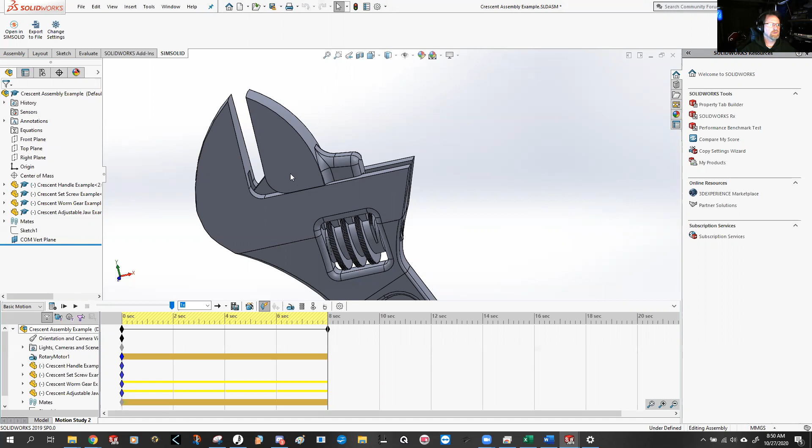Since I'm on the assembly, I'm just going to go here. Don't worry about these two, they come later. Going to look at how it connects up with the assembly file, and then we assemble the set screw.

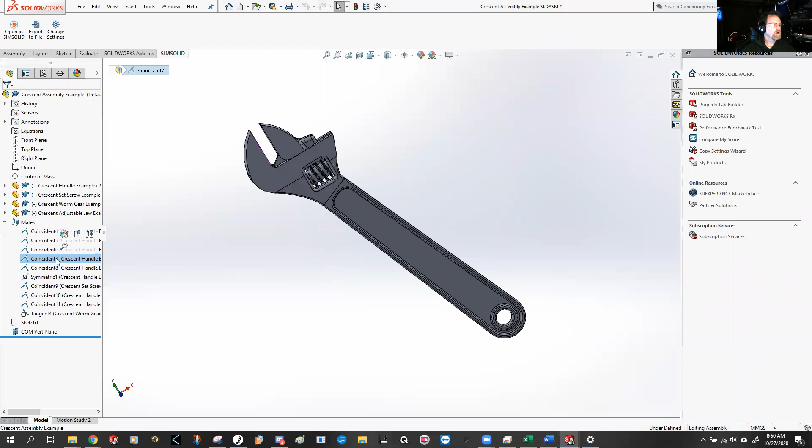There we go, the set screw, and then the handle with the thumb worm gear. There it is, okay. And more on the worm gear.

Finally, we place in the adjustable jaw, and then that tangent, which is the real bear. Sometimes that's the one you want to work with, sometimes you have to delete it, sometimes it just helps to suppress it and then unsuppress it. Sometimes you can do this and it recalculates it maybe in a different way, and maybe that'll help work out.

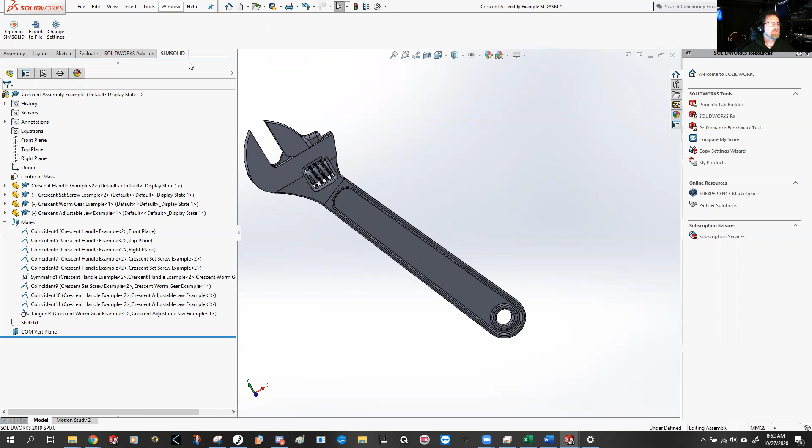Hopefully it will do something like this. All right, so that's the assembly. In some ways that little bit and the motion study are the hardest part, so I want to make sure all those parts are together in the right ways.

If you have extra mates, that can really cause problems, so you have to get down to the bare minimum number of mates, and this is pretty much it. Might be even fewer that you can work on—there might be more efficient ways of doing it, but you certainly don't want more.

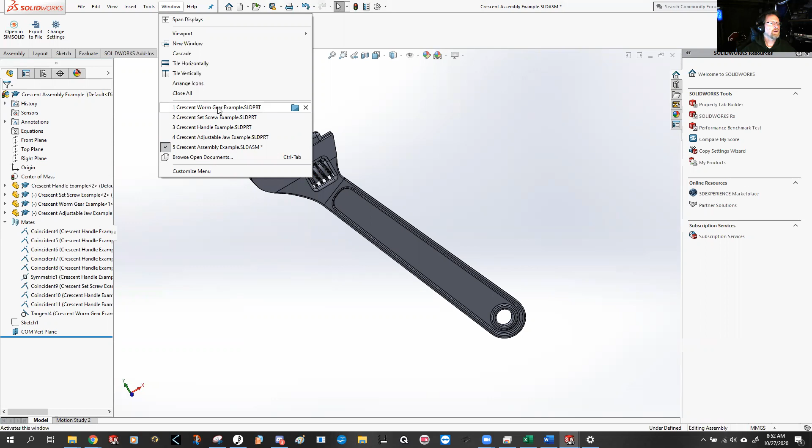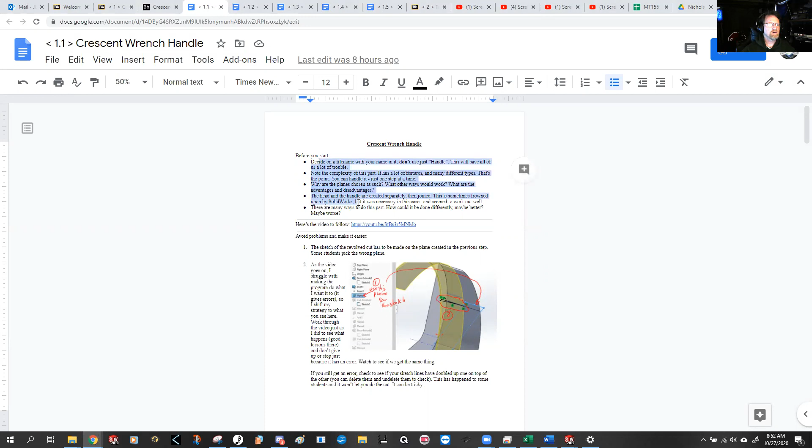Now I'm going to go up here to worm gear, and instead of going in order of events, I'll go to the handle. Make sure that before you start, assuming you're on this video, you go through all of this guidance.

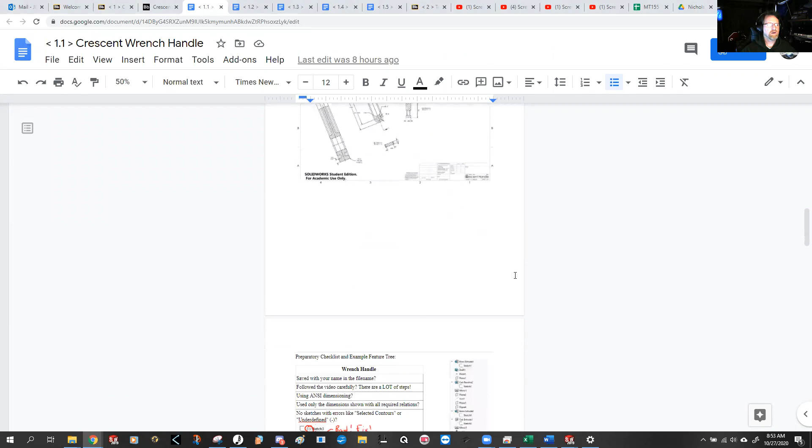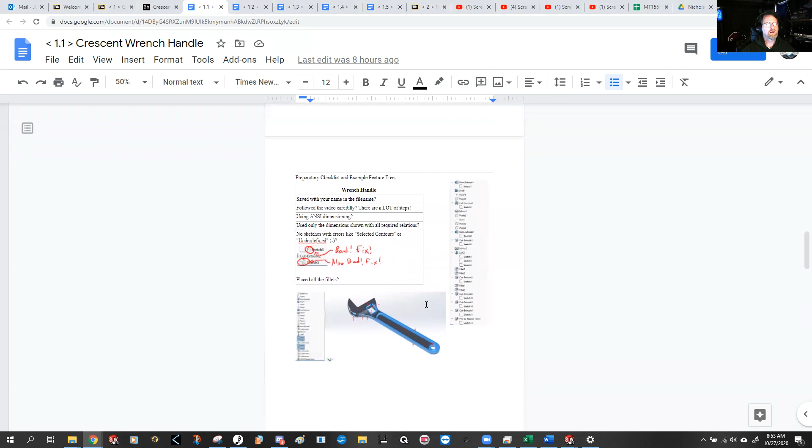All right, so here we are with the handle again. The first thing I'm going to do is open up all of these sketches. If you do this ahead of time, that makes me happier. You don't have to worry about the ones up here, but all the sketches.

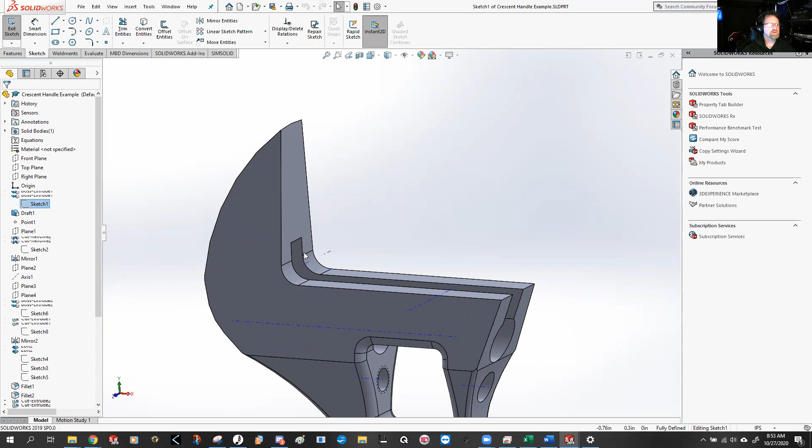I'm going to look around for the correct dimensions, anything that looks weird. Sometimes people have issues with this and the 2.20 going to the tangent—maybe they put it to the wrong spot, so it looks similar but not the same. So making sure all the dimensions are correct, got the right shape.

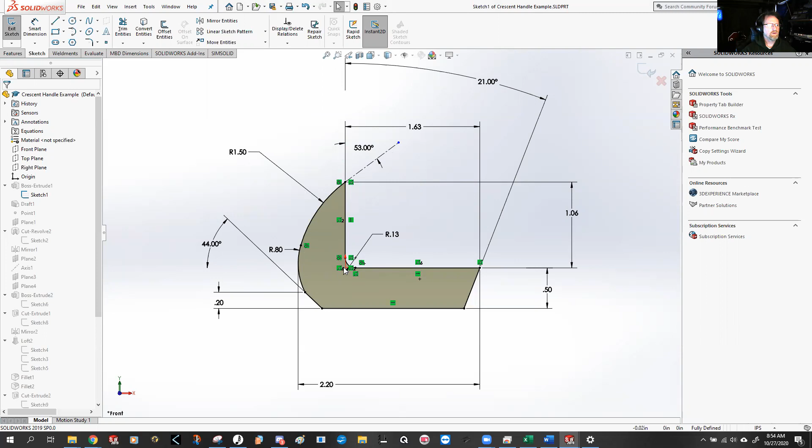All right, good to go. And notice how I put the origin right here—you'll understand why if you don't already, by looking at the assembly.

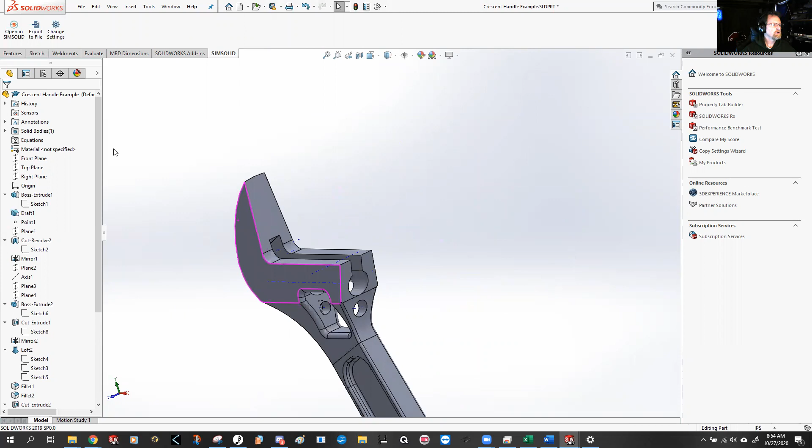All right, so then I'm going to look at the draft, make sure it's going the correct direction. You want it to kind of taper upwards on both sides there. And then we create this little point, plane—that point is right there, plane there, and then we do that cut revolve.

Yeah, and that cut revolve's kind of a pain, isn't it? Yep. Hope it worked out for you.

Then we mirror that. Once that's done, mirror shows up.

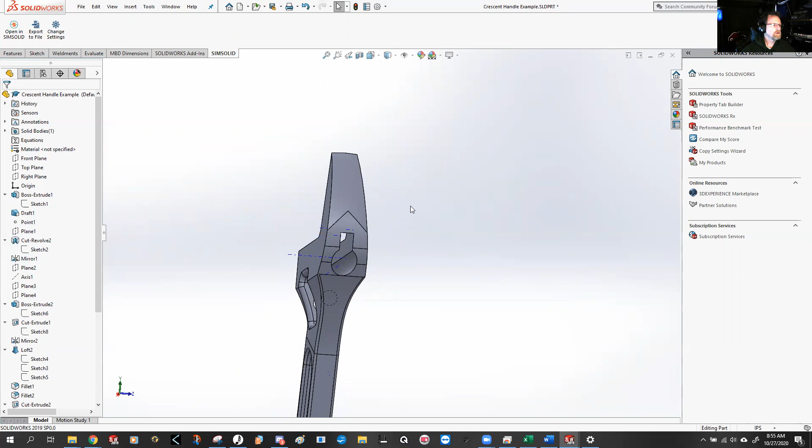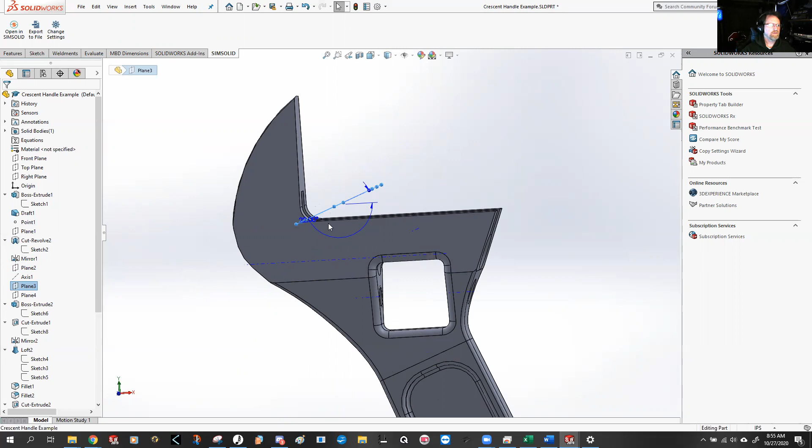And then there's this plane. This plane is actually pretty important. Or is it the other? I'm sorry, it was plane 3 that I was talking about. Okay, so then plane 3, plane 4. So what I do with plane 3 is I adjust it, because plane 4 is dependent on the angle of plane 3, which is at 22 degrees.

So I just have fun with that. I change it to 25, and I follow to see if everything else has followed with it. Watch the handle. Okay, the handle comes up like this. It wrecks the fillet that was going around here. You'd hope that it would go here, but I guess it doesn't.

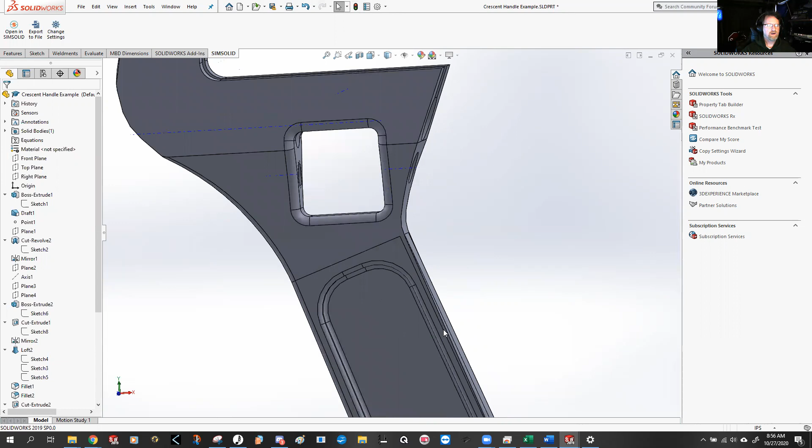And then I do that same thing, and I change that 25 to 20, and watch the handle go again, back the other direction, and that fillet still doesn't come around, but that's okay. Everything else, nothing else is broken, nothing else is weird. And so then I just undo both of those.

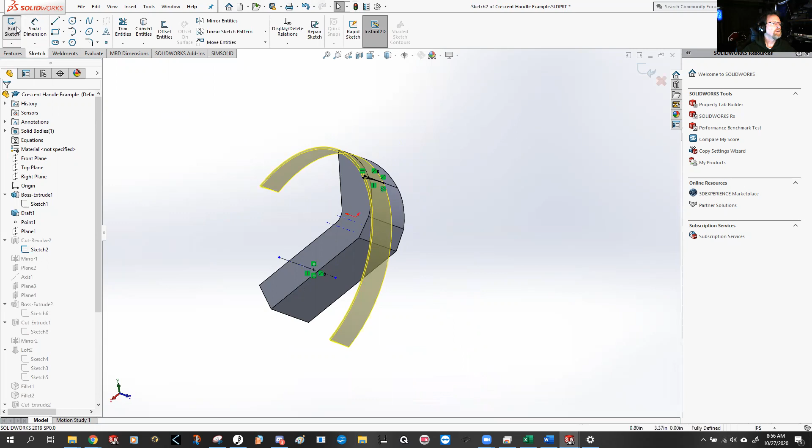All right, so now that plane is back to 22 degrees, where it's supposed to be. Those fillets come up here, those fillets come there, and all is well. Now, if it was a little better design, maybe those fillets would actually continue on, but at least nothing else breaks.

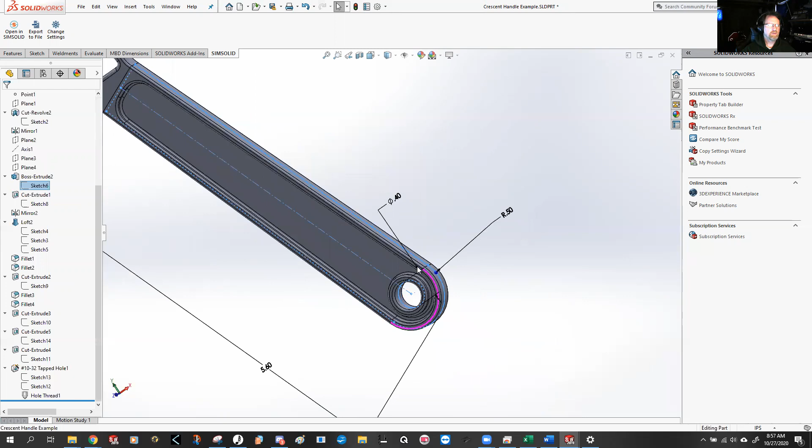So I'm going to go to this sketch, and make sure that dimension is going all the way from this plane down to the tangent. We've got a radius of 0.50 here. Sometimes people make like a radius of 1 or something different. I don't know why, but there you go.

All right, now it moves a little faster here. We've got this cut on this side.

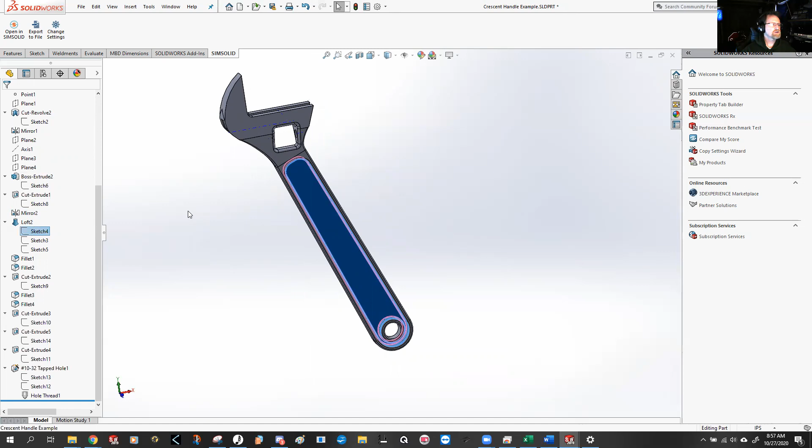And then it mirrors. Lots of mirroring here. Then we have the loft. Now we've had it all set up. We got this sketch here.

Sketch here. Could have used the surfaces here. Yeah, sure. And then that one. But I kind of liked watching how they all look in this particular view.

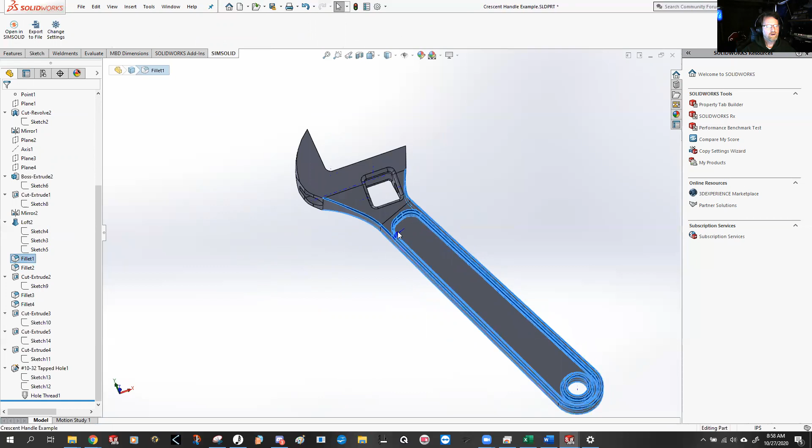All right, so there's that fillet that goes everywhere here. And it's what size? Like 0.03. And then this one is 0.43. There's a little different fillet here just to get a smoother edge there.

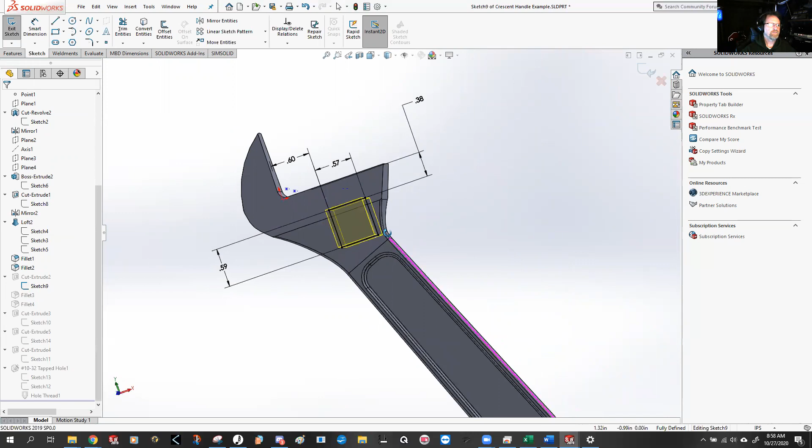And then we cut this big hole for the worm gear. Put the fillets in the corners first so that our second set of fillets, or the fourth set I guess, just goes around nicely as a tangent propagation. So the order of events is important.

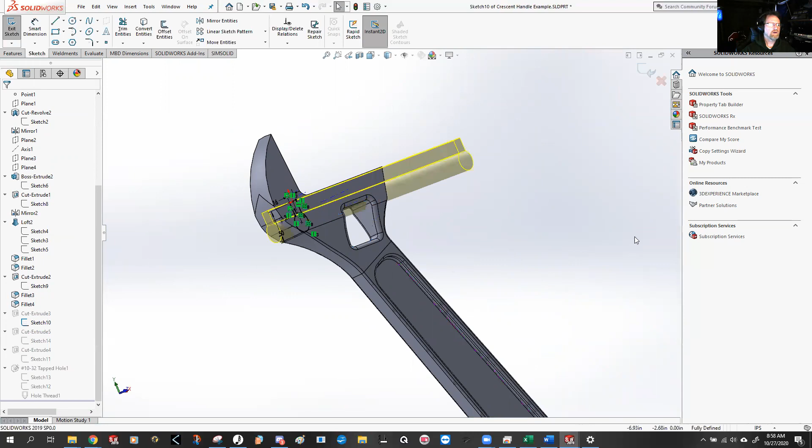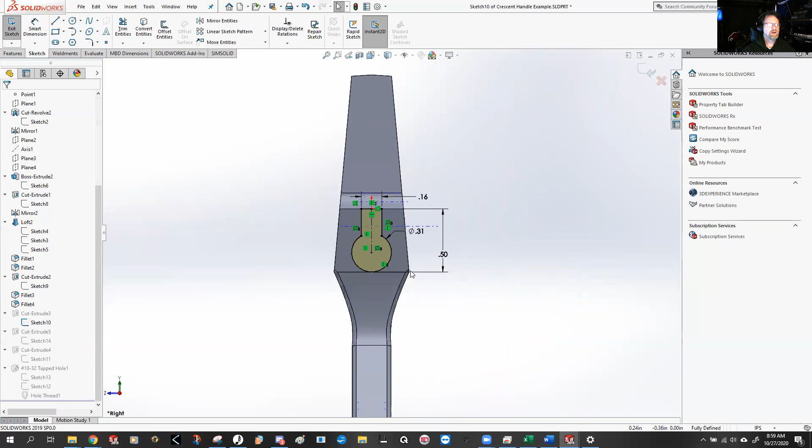All right, then we make, looks like a keyhole, a slot for the jaw to slide through. So it's exactly 0.5 top to bottom, 0.31 diameter here, and 0.16 across. That's how it's all symmetric.

And this one, notice how it's the sketches in the middle, and then it extrudes, and extrudes specifically to these two surfaces.

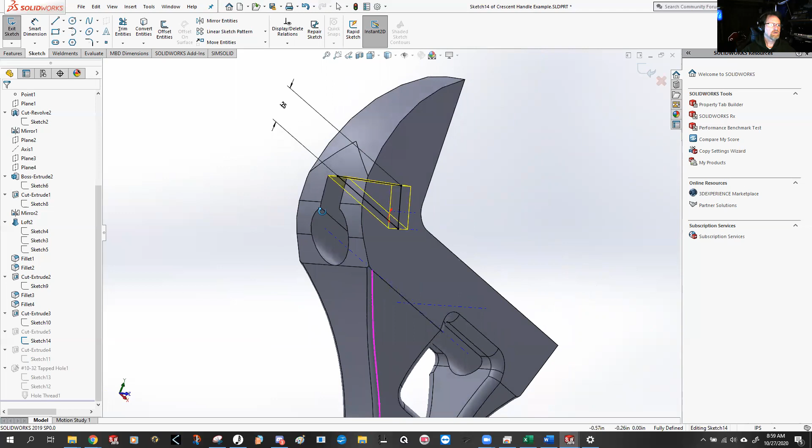All right, now location of this hole is important, but pretty easy hole to do. And then, as you may have seen in the guidance there, this hole should not have a counter bore.

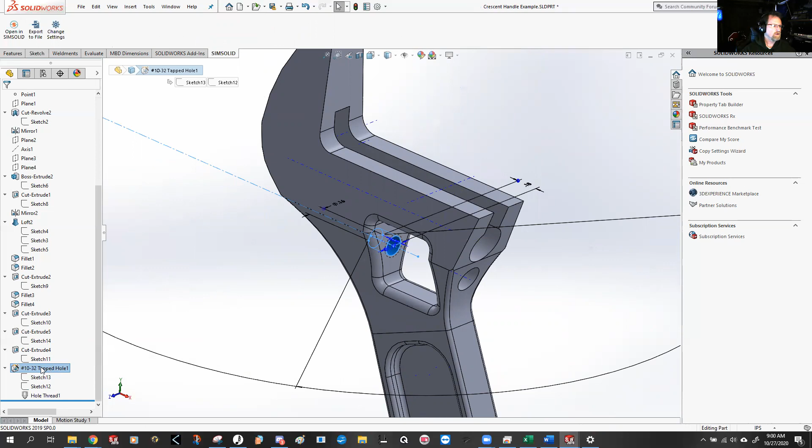When you put this in, it might have this box checked automatically. This one down here, where it says far side, make sure that's unchecked. Yours might look like this. Don't want that. You want it like that. And then you're all set.

All right, and so the handle is the biggest deal of this whole situation. All right, so let's go to

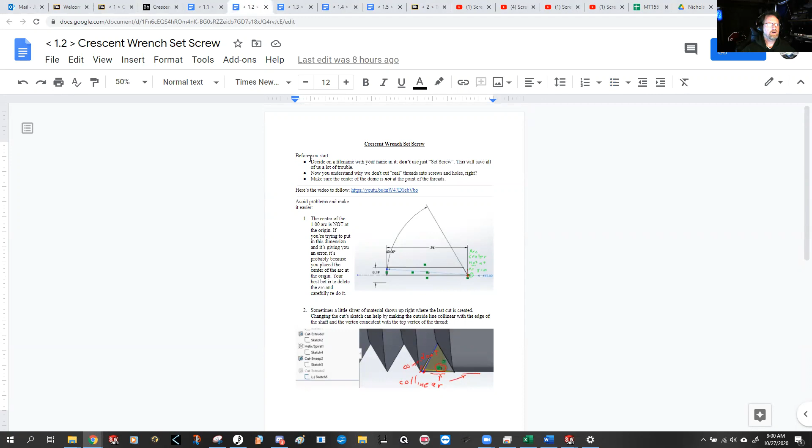Here's the set screw. This is all the guidance on the set screw, and make sure you go through these bits. And then finally the checklist.

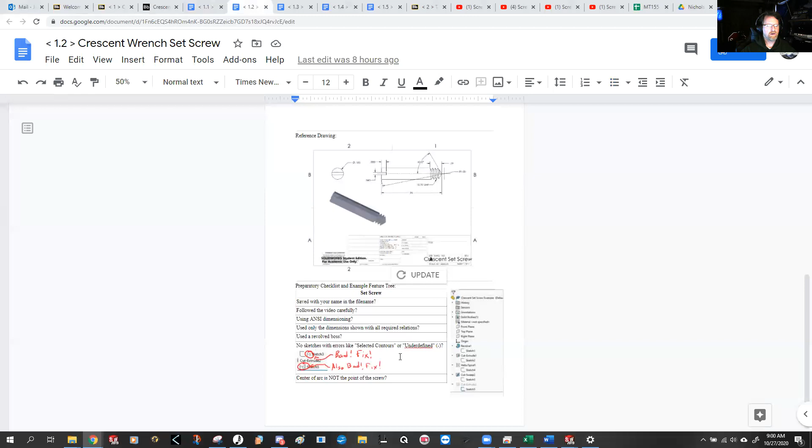Now for all of these, remember, we do not allow the minus signs or the selected contours. So make sure that these get fixed. If you don't know how, I can send you that link, or we can go over it on Zoom.

All right, and here's the example feature tree as well.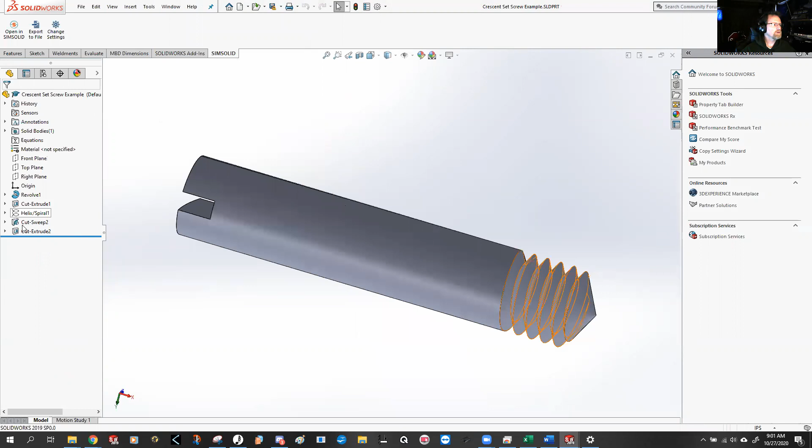Okay, so let's go to the set screw. Fairly straightforward. Open up those sketches.

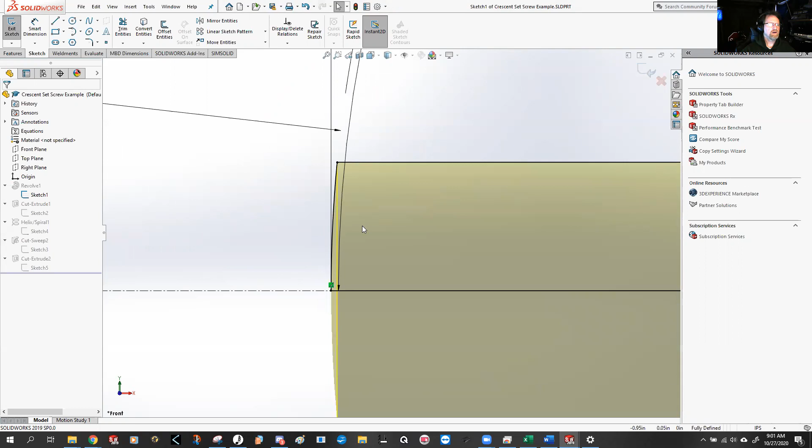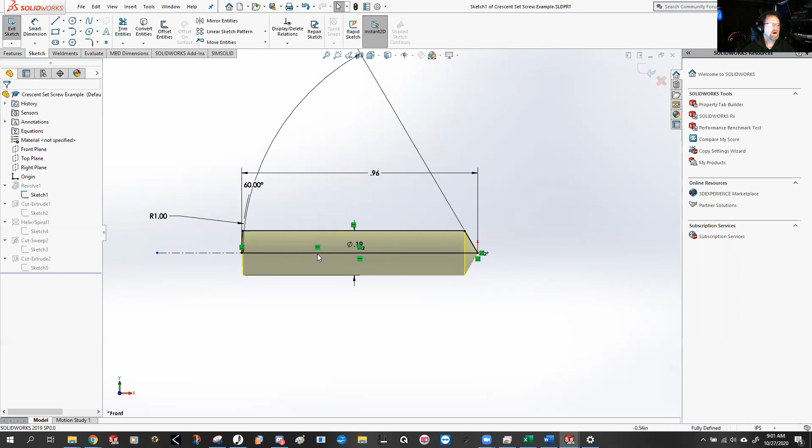The key problem here that students run into is that the overall length from point to tangent is 0.96, but the arc has a radius of 1 inch. That means the center of the arc is a little bit further past the point, and I put the origin at the point. Sometimes students, maybe because they don't have a larger screen, put the center of this arc right here, and then they wonder why the computer yells at them. Best thing to do is to delete the arc, then make a new arc using center point arc, and make sure the center point is way out here.

Then you go up here and do that, and you might have to trim a couple things, but it'll work out a lot better for you.

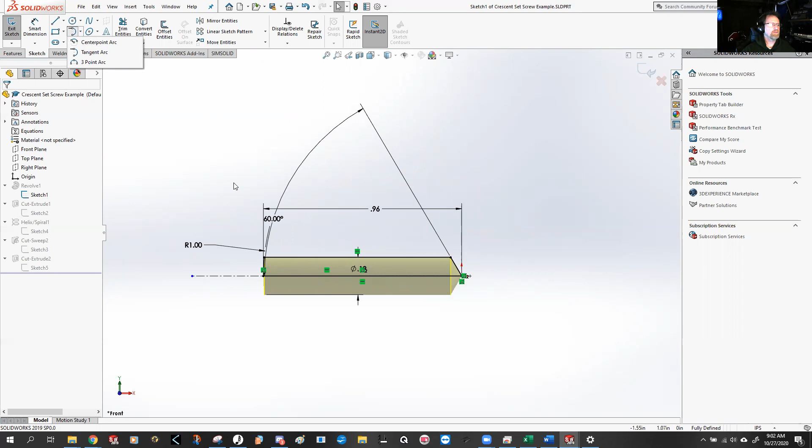All right, so this cut's fairly easy, both sides. And then instead of looking at the sketch, which is just a circle, look at the actual helix. So we look at the height, the pitch, and sometimes it helps to change the start angle up.

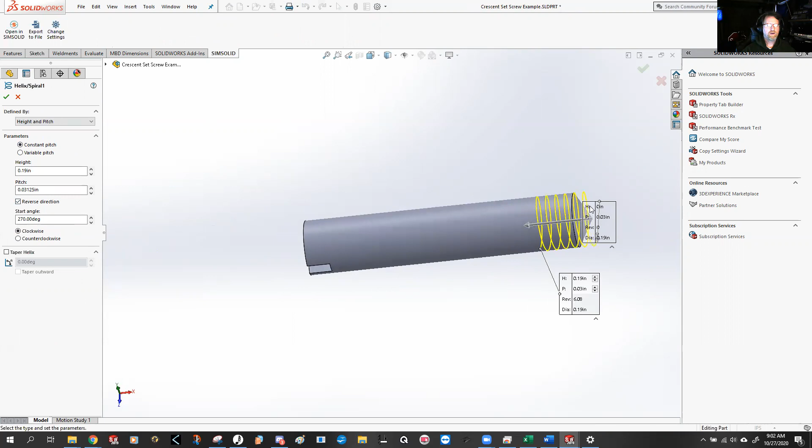And so that's done there. Oh, something happened to that. Lovely. All right, well, let's go find out what happened with the cut sweep.

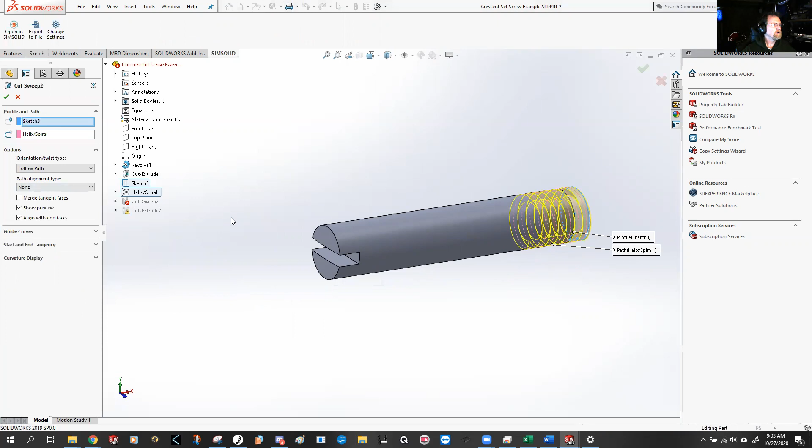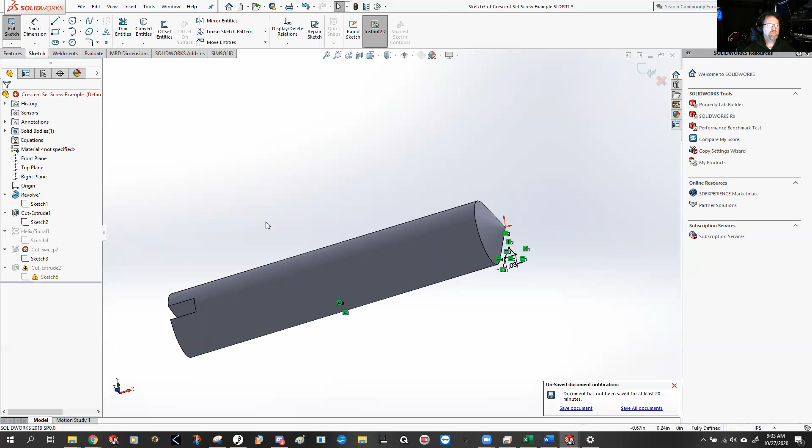Self-intersecting geometry. Well, that usually happens when our sketch is a little bit funny. So let's go to our sketch. I wonder if I changed this up at some point in time. I don't think I did.

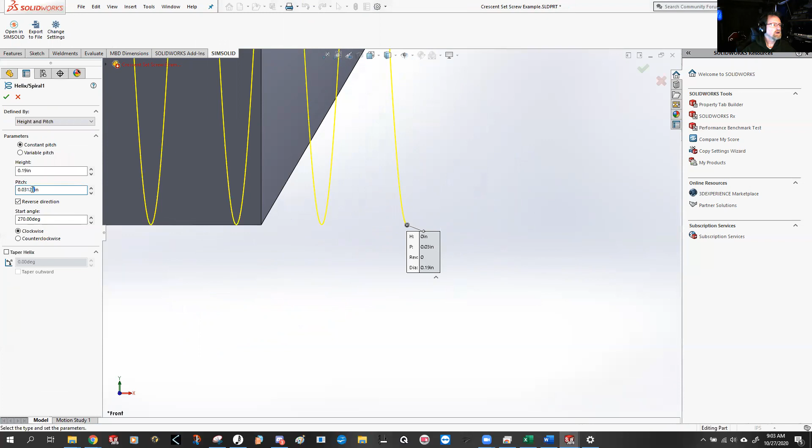This often happens when the width of the sketch here is, notice how I have 0.0312, the same size as the helix here, 0.03125. So I want to make sure this is correct. I'm going to change the sketch a little bit here to 031.

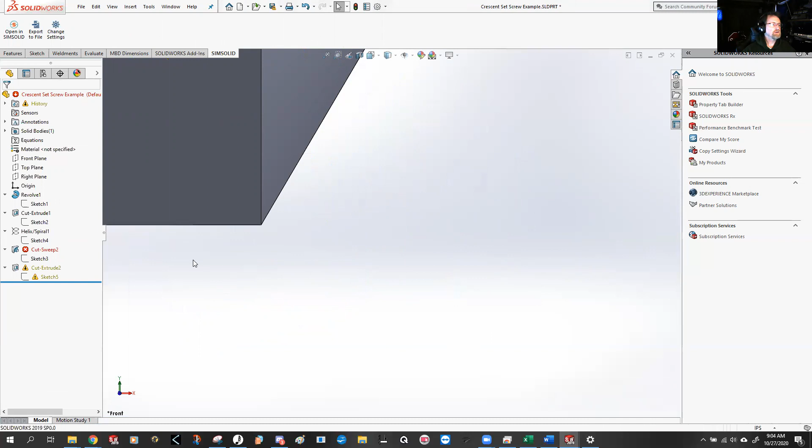And it still doesn't like it. Let's see. Maybe something happened in 2019 that didn't like that. Okay, even worse.

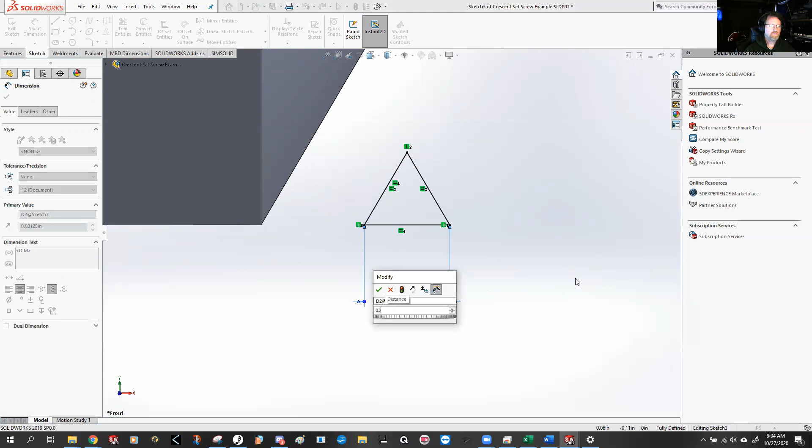Okay, so the problem with doing that is, as you can see, I get this little ridge here. I'm not very happy with that. So I'm going to try to regenerate it. And it gives me an error again.

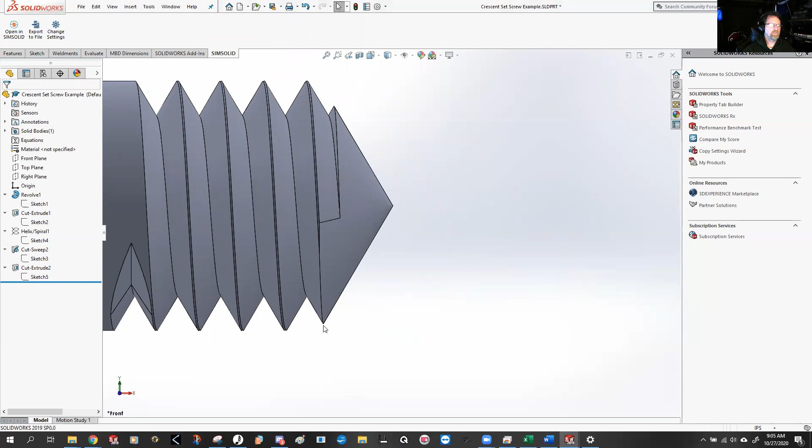Well, hopefully you're not running into the same thing as I am, but at least I've shown you how to do it. What happens is that if this edge gets too close to itself, it becomes like an infinitesimally small thing.

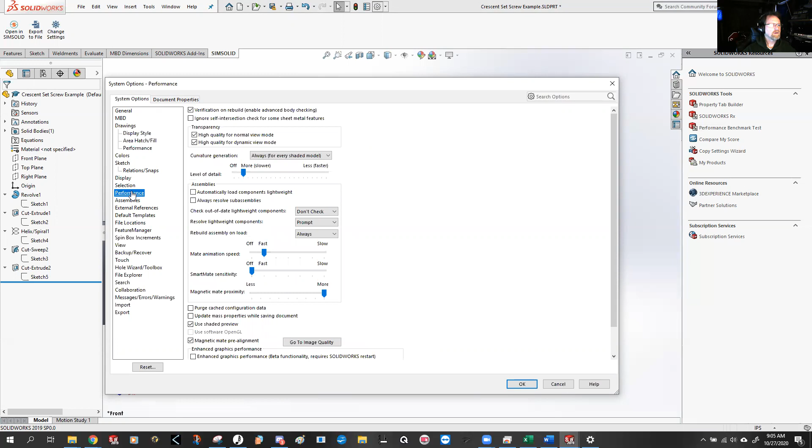So one other thing that can help you with that is going up to system options, and maybe this is what was different from when I originally did this. I think it's under display or performance. Image quality, there it is. All right, so if I have higher, faster image quality, it may improve.

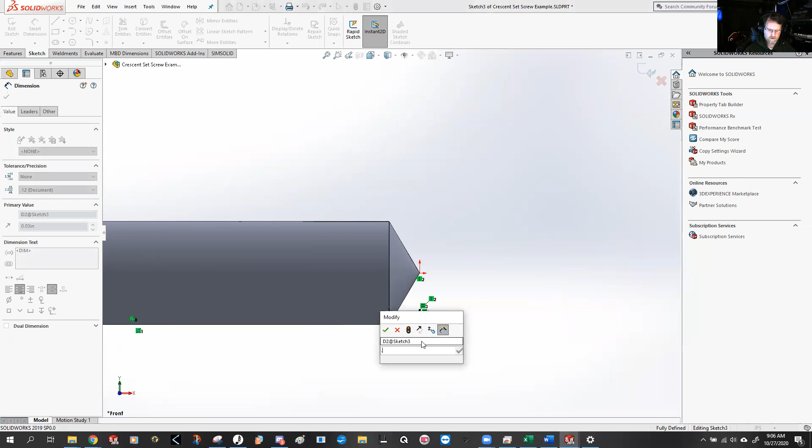Yep, there it is. Oh, sorry, let's do it with the old one. Let's do it. We got... yeah, didn't like it. All right, well, it was worth a try. I'm really surprised because this was working just fine yesterday.

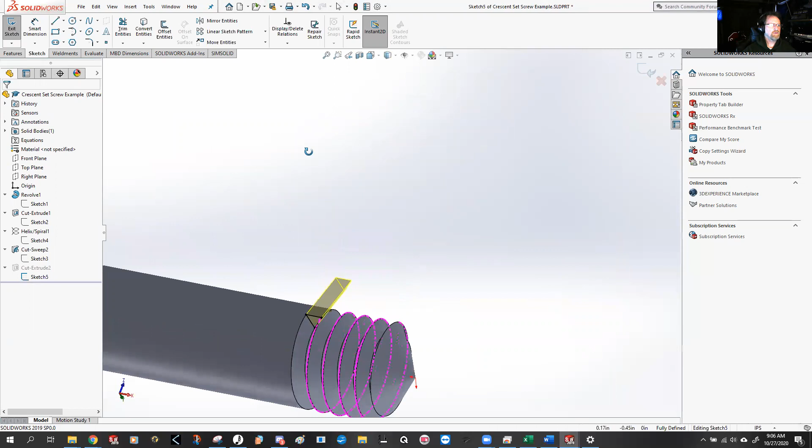Go figure. All right, so for the final bit here, we've got this cut extrude. And I think I mentioned that if it's not working out right for you...

Okay, so yours might be a little bit off like this, whatever. You might want to delete those things, grab this, and make sure that it is collinear with that edge there. Then take this point and drag it to that spot, and then you've got all of it.

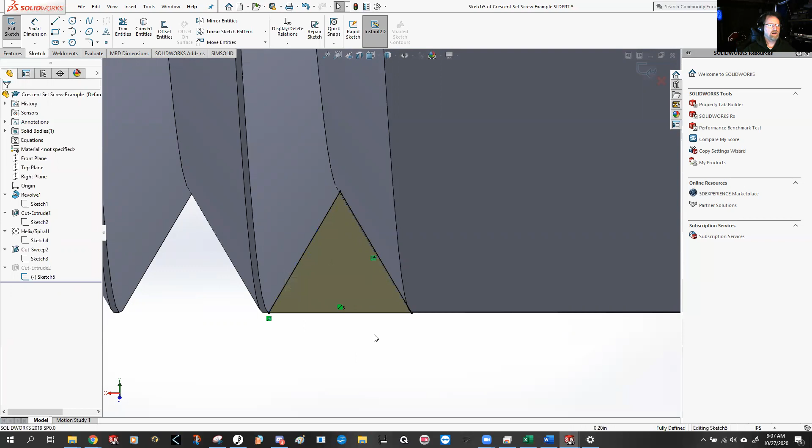And so that should work out well. Again, sometimes people have this little sliver that shows up there, and so you'll have to do that to fix it. All right, and by the way, this is why we don't make actual threads.

One of the reasons: a thread is a whole bunch of tiny little cuts that really don't help you unless it's really crucial. So not every screw—if you had every screw on every part with all the threads, you'd bog down your system terribly.

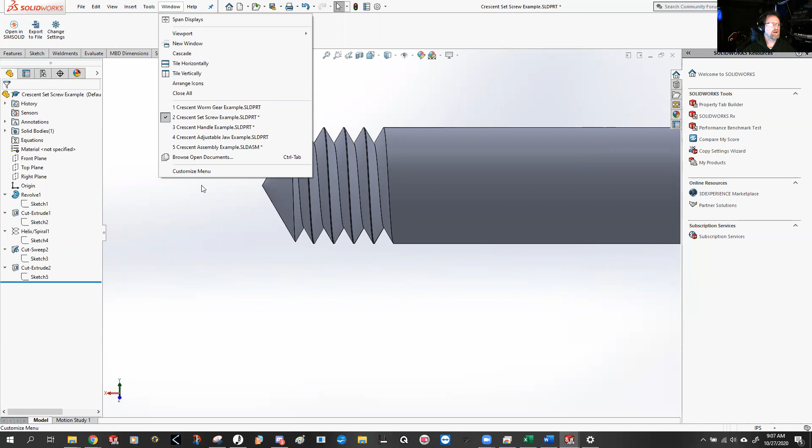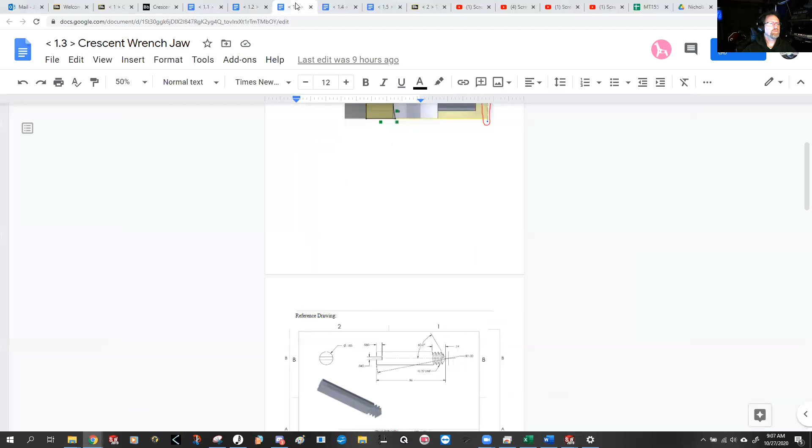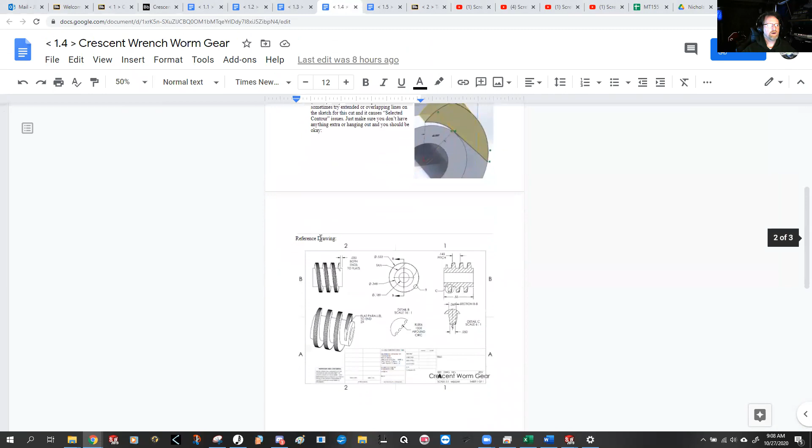Okay, here's worm gear. And oh, there's worm gear. Make sure you go through all the steps here to avoid the problems and the tough parts there.

All right, so I'm going to hide that right plane there, open up all the sketches, make sure there are no bad symbols, symbols of doom, and check the dimensions here. Now this helix spiral, notice how this should be 0.548 and 0.145. Hopefully by this time you figured that out.

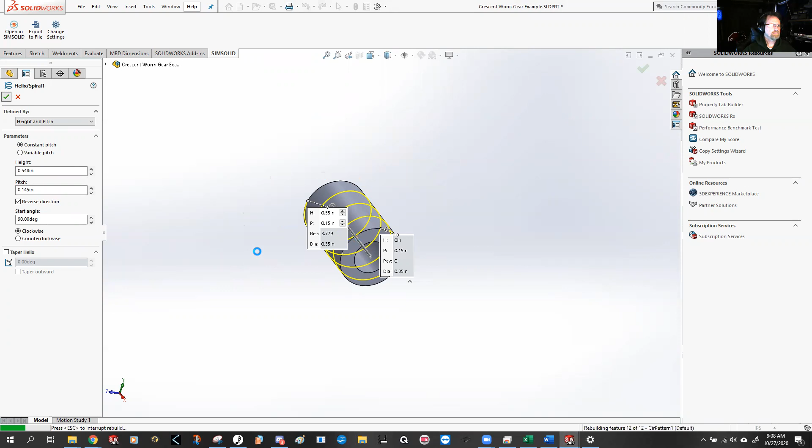All right, didn't crash. So the sketch, of course, is just a circle, and it's attached to the one thing, so not too worried about that.

Now this sketch is kind of funky because it's symmetric, but it's hanging off the edge there. And of course, that's by design. So we look at those dimensions.

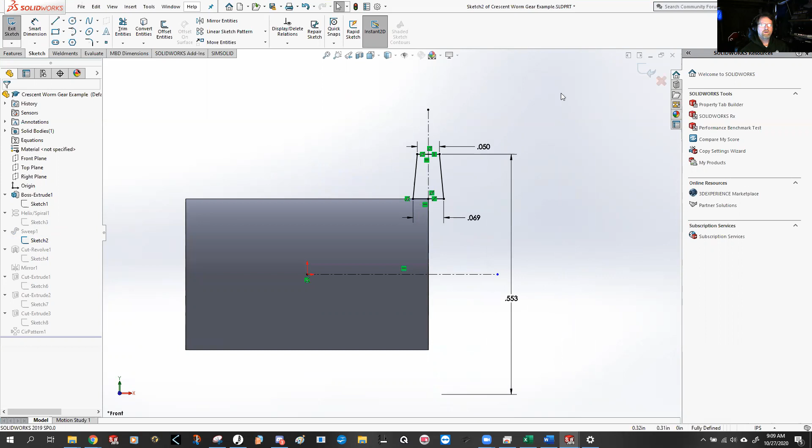And then we cut off that end. I tried doing this a whole bunch of different ways, but this seemed to be the best in this case. So I had to cut off that end and mirror it over there.

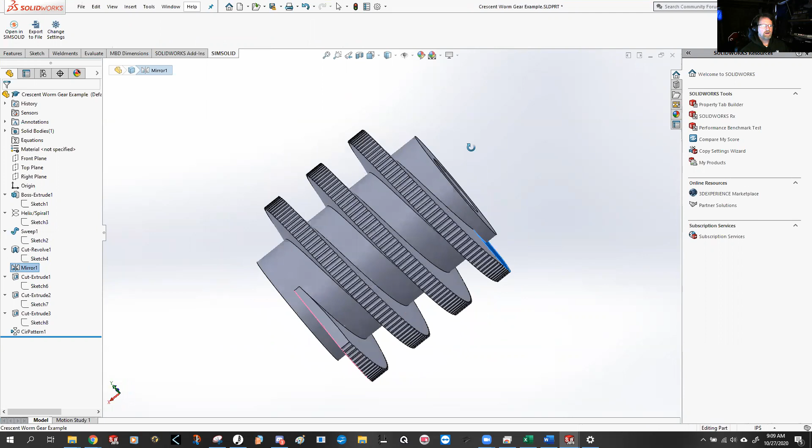So making sure that the mirror happened and that the cut happened where it's supposed to be. And then we've got this cut extrude.

Now you may have problems with this. If you see here a minus sign or a selected contour symbol, then you should really go back and redo it or check it out. Remember how to do that: right click on the feature, not the sketch, the feature, edit the feature, and then where you see selected contours, just click on it and clear out all the selected contours. Mine is okay, so I don't have anything in here, but you want to clear that out.

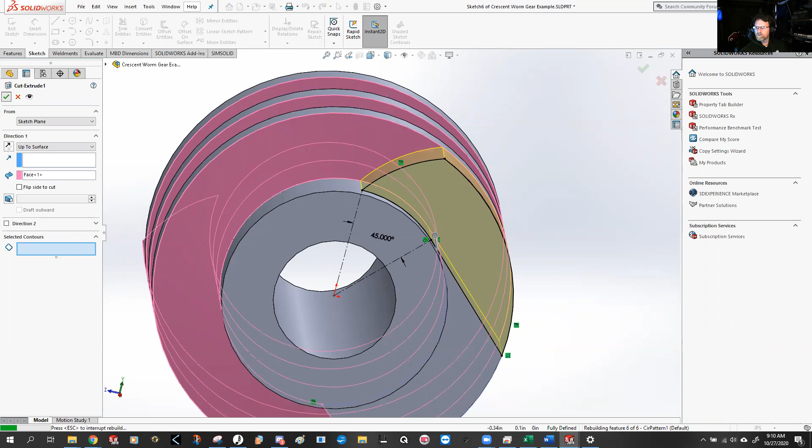Okay, so there's that cut extrude on this side, and then we redo that again because it was so much fun the first time, on this side.

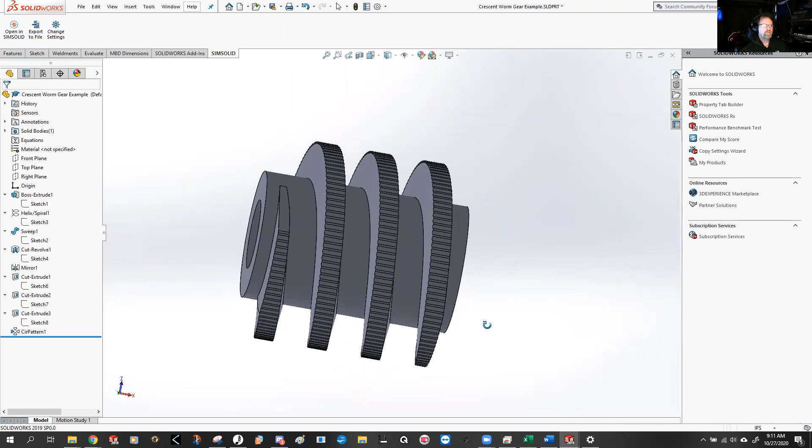All right. Finally, we have that one little cut. Now notice how I often just want to cut exactly what I want, but in this case, it was just so much easier to do a circle, and it worked right on the outside. And also the way it rotates, we probably would want the circle anyway.

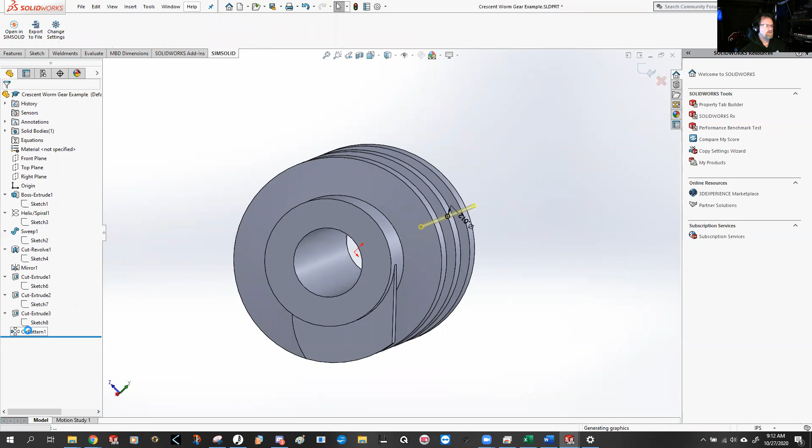So in that pattern, and wow, that's a lot of them. Okay, and you can see here, right down the middle, there's 100 of them.

All right, so last but not least, the adjustable jaw.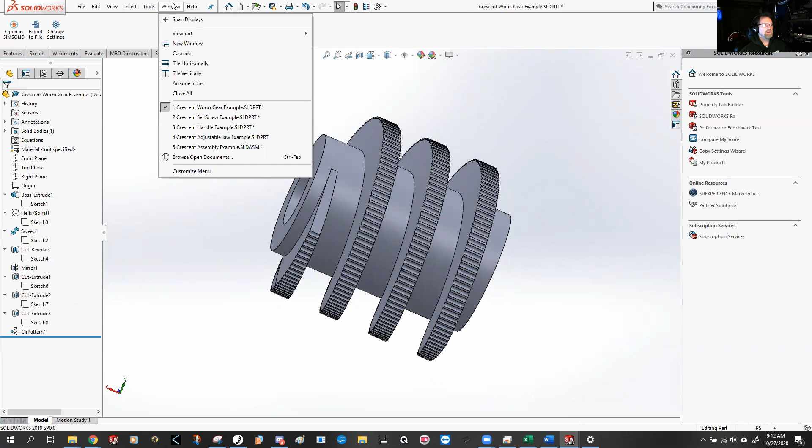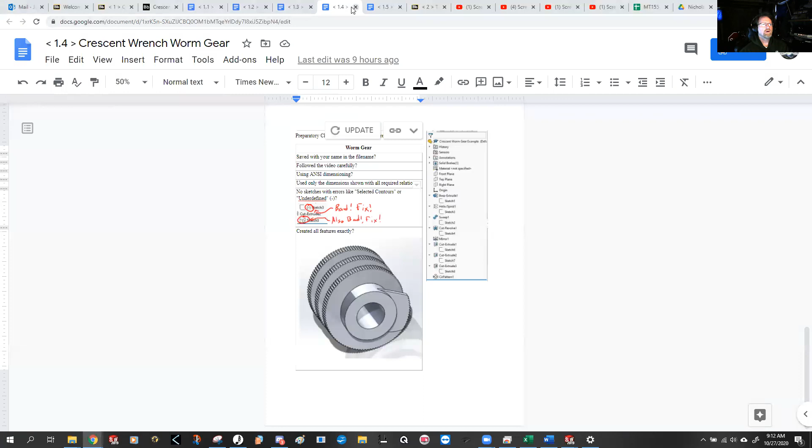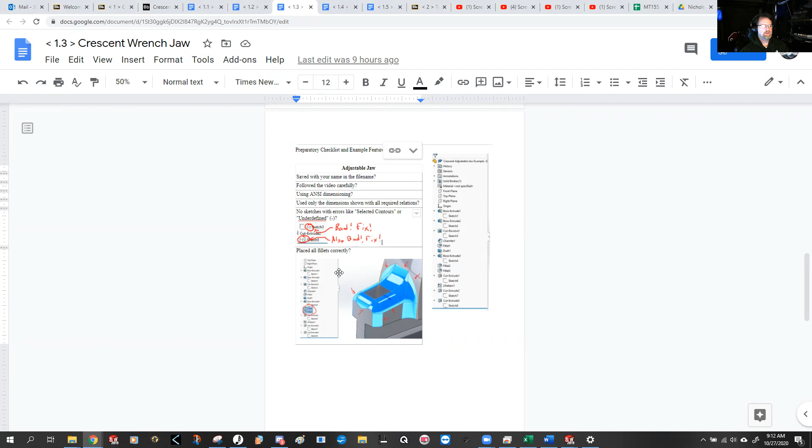And make sure that you go to the jaw here, and probably might add some things in here, but you've got the drawing and you've got the example feature tree and some of the usual things, and a question about the fillets that are in there. So we'll get to that in a second.

All right, so just go to this. Make sure everything is about right.

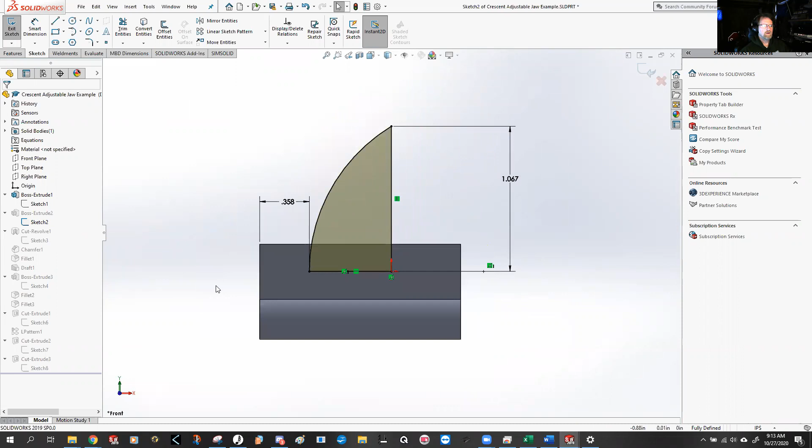The shark fin. This feature is always weird, every single time, just about. It shows that it cuts down here, but actually cuts up above there. I don't know why. It's pretty crazy.

So this chamfer, I'm showing you how to do a chamfer that's not 45 degrees, so you can specify the distances on that.

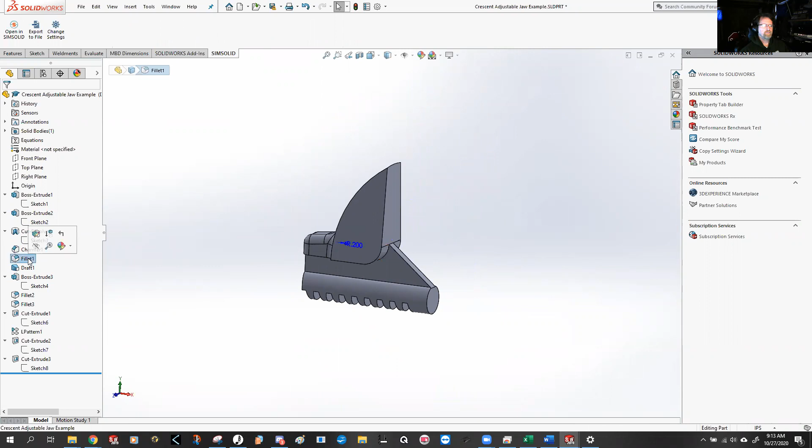And back to another draft, making sure it's going the correct direction, tapering towards the top. And then there's this block, throw on here, symmetric, aligned with everything else.

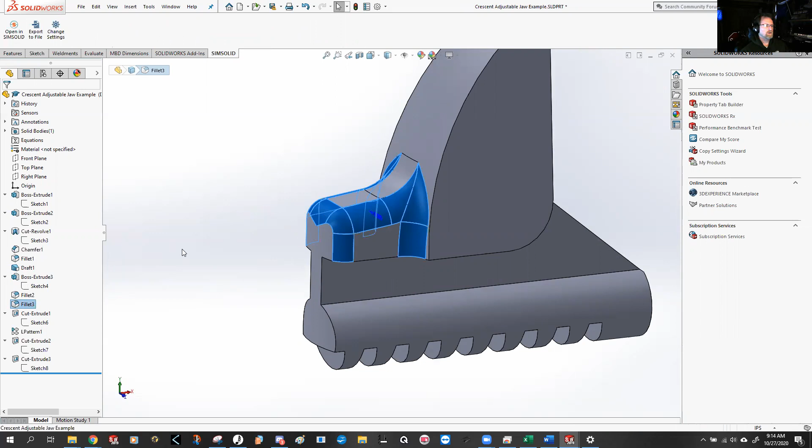And then here are those fillets that just kind of round everything out over here, and finish up with these cuts that allow for the thumb screw or worm gear to move through.

All right, so then there's that linear pattern. There's 9 of them at 0.145.

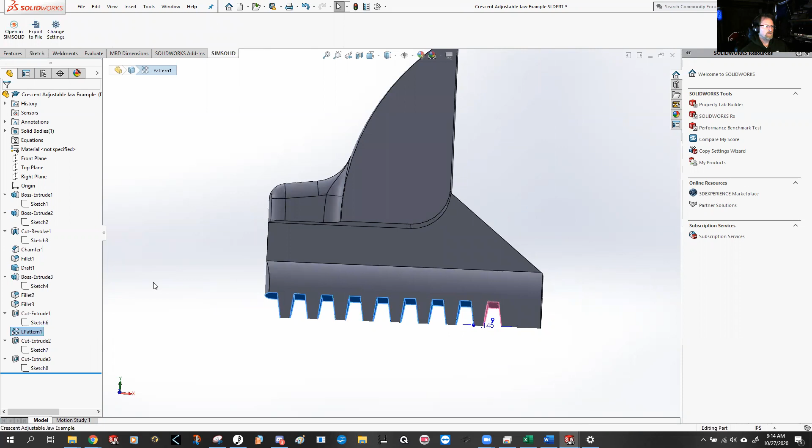Then we finish off with a couple of annoying cuts that I hate, but that's okay. Had to be done.

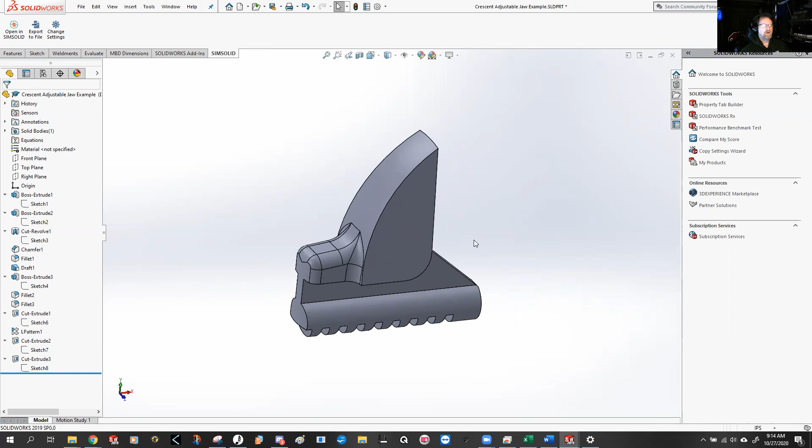Okay, and that is what I'm going to be looking for on the crescent wrench. A lot of things won't fit together properly if you don't make them right, so do your best to move through that.